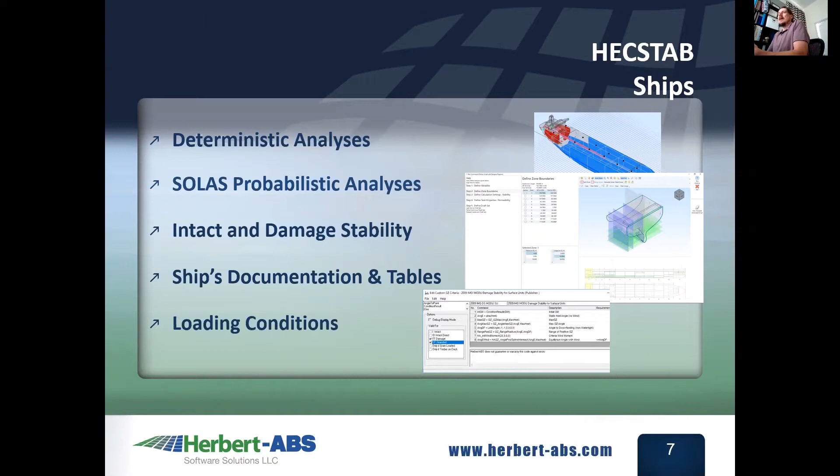On the offshore side, some of the things that we've done for HECSTAB to focus on the offshore is basically we've made our software applicable for any type of vessel, any type of shape, not just ship shapes for offshore vessels. We've looked at jackups and semi-subs and round floating FPSOs and basically any shape that you can define, we can do a calculation for it.

One of the main drivers we've had recently has actually been ABS itself, and we are in the process and working with ABS to have them use HECSTAB offshore as their internal tool for stability approval.

One of the other main drivers for our HECSTAB offshore development has been this idea of a free twist calculation. When you're looking at stability for a ship shape, generally speaking, you're only looking at stability along one axis, the longitudinal axis. For some offshore shapes, the stability axes and how you rotate things and heel vessels over becomes a little bit squirrely depending on the hull shapes and things like that.

So some of the newer approaches are doing things like free twist or variable axis heeling moments or heeling righting arm curves as opposed to just having a fixed heeling axis. So we'll look at some examples of those as we go through some of the hands-on presentation.

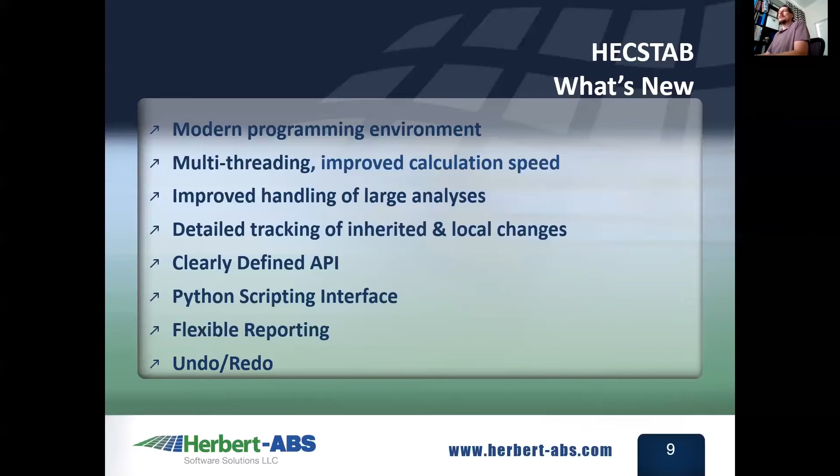and write things in a Python scripting interface to do special analyses or one-off investigations or customized reporting or things like that. We'll go through a number of ways that we're already leveraging this API and this Python scripting interface. We'll also look at the flexible reporting options, and we have added something that people have asked for a long time, undo and redo capabilities. So that's now built into the software as well.

So for those that haven't used our software before or haven't seen the overall package, I like to show this screenshot just as a quick overview of how things kind of fit together. There's two sides to our software package in general. There's going to be the modeling side, which we have here on the left. And there are options to take external 3D models from things like a DXF file or Rhino or other stability software and import them into our modeling software.

But basically, our ship project editor is our main modeling software. That hasn't changed. For those of you that have used HECSTAB before in the past, the ship project editor is still included with the HECSTAB package basically, and is still used to do things like creating the ship project editor reports, things like vessel documents, hydrostatics, Bonjeans, capacity tables, tank tables, sounding tables, things like that. So everything here on the left side is relatively unchanged for HECSTAB. It's basically the same on that side.

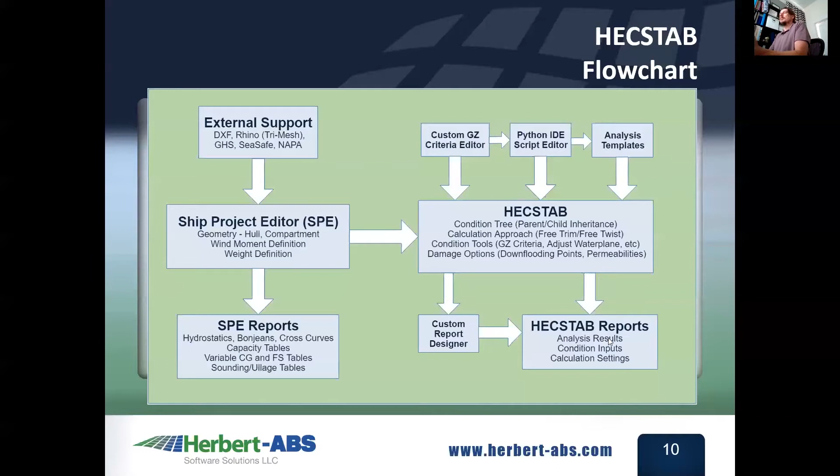The interesting part is here on the right side where we have HECSTAB, which is going to be our main analysis interface, and we'll be looking at this very shortly. But you can feed into it a number of things. There's custom GZ editors, there's the Python or the script editor, there's analysis templates. These are all ways to kind of set up an analysis in HECSTAB. And then once you run an analysis in HECSTAB, you can get custom reports out of it and either view the information on the screen or print it onto reports as you would like.

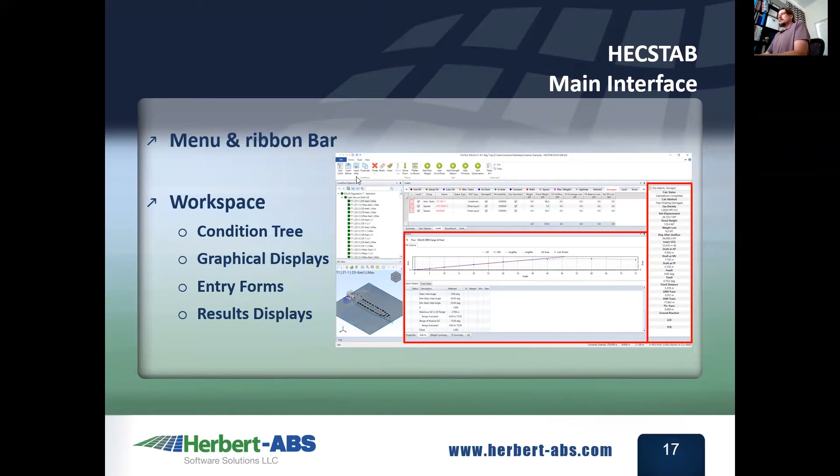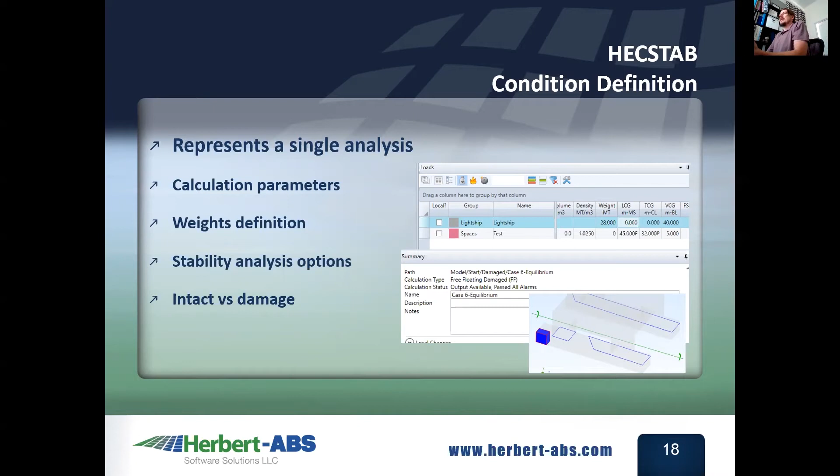The one thing to note with HECSTAB is the idea of a condition. So the HECSTAB interface is going to allow you to set up a hierarchy of conditions, where each condition is going to represent a single analysis. It defines the calculation parameters for that condition, your options, whether it's intact or damaged, your weight definitions. Anything you want to change or investigate is going to be a setting on a condition. So the analysis tree in HECSTAB can do an analysis on one or more conditions.

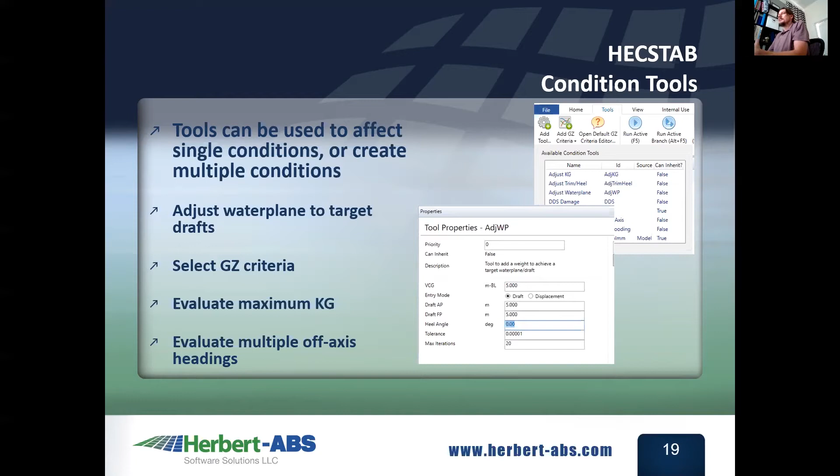We also have this idea of condition tools, which is something that, instead of just having a simple setting or changing a weight, can do something more complicated. It can do a calculation to get you to a specific draft. It can do a calculation to evaluate a criteria. It can do an iterative calculation to find a maximum KG. It can create subconditions to look at different axes. So the idea behind condition tools is that they're very powerful and very flexible, allowing you to set up the condition tree and your analysis in an efficient and accurate way. And again, we'll go through this process in the hands-on section here in a bit.

But we do want to talk about the hierarchy of these conditions. One of the primary things that we're looking at with HECSTAB is the idea of the condition hierarchy and the condition explorer and how things basically inherit down. So I can set up an analysis where I start with a parent intact condition. This is my top level intact condition. And then I can go down and define sub-children where everything kind of inherits from this condition down into my child.

But then I can change something on this step. And then I can add steps below that where things will change on that condition. And everything kind of just trickles down as you go down the analysis. And if you do a full analysis, but then you come back and say, well, let me change a few things here at the top, all of those changes will then trickle down as necessary and as applicable through all the child conditions. And you can easily update and iterate on an analysis very, very quickly.

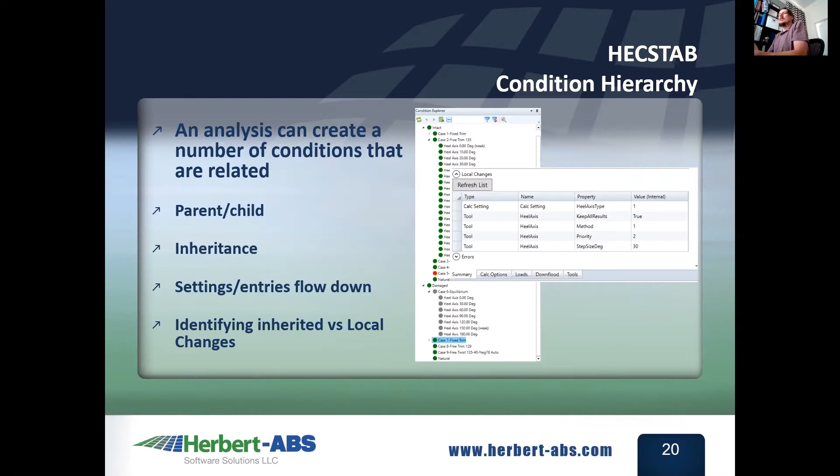A few other things to note: on the HECSTAB offshore side, one of the main new features that we have is the idea of a free twist approach for stability. It's basically representing the path of least resistance, and it allows offshore shaped vessels to heel and rotate as they want to, as opposed to a free trim approach, which is artificially forcing a rotation around a specific axis.

Analysis templates is another one of our main features here in HECSTAB that we've added recently. There is this idea that you can do everything in the user interface and set up an analysis by hand, but if you're doing standard cookie cutter type things a lot, something like an intact max KG curve, then these analysis templates are basically designed to allow us to give you

some templates, or the users can create these on their own, that basically just walk you through the process in a wizard type approach, where just the basics, just the things that you need to enter and define for a given analysis can be entered, and it can easily go through and set up the analysis for you automatically. And we'll look at a couple of these as we get into the hands-on demonstration as well.

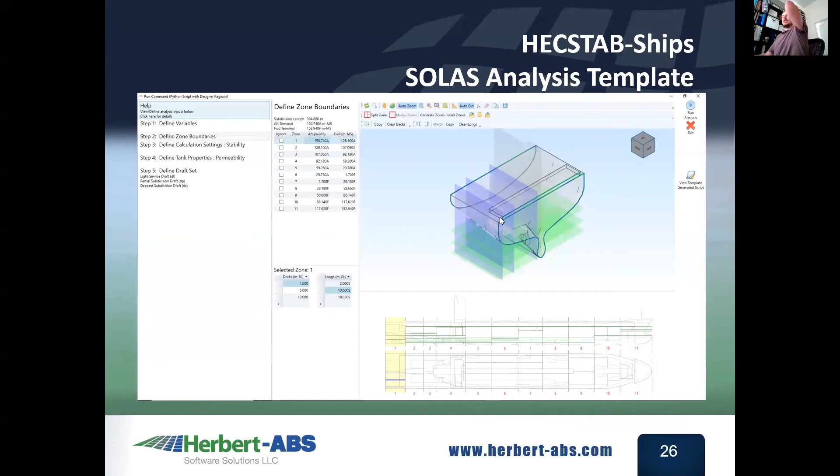So for example, we've added a SOLAS analysis template. I'll talk about this and walk through a detailed analysis on this side as we get into the hands-on presentation. But this is just showing some screenshots of what it would look like. And we'll do this on the hands-on side as well.

And then finally, on the reporting side, we're working on two ways to do customized reporting. We have a database reporting approach, and we're working on implementing a Python script reporting approach as well. And I'll show examples of both of those when we get to the hands-on as well.

Moving forward, with this rollout of our new HECSTAB software, we are trying to build a community and to expand our user base and hopefully get them to share information and share tools and files that they've used in HECSTAB, so that there can be a central repository for GZ criteria, or people that have put customized reports together, or even advanced Python scripts that do certain specific things.

We're trying to encourage our clients to use HECSTAB to develop tools that they need to use, and then possibly share them with others, and have access to what other tools other clients have provided as well.

And then looking to the future, we're going to be working on HECSTAB for the foreseeable future, and it's going to be the foundation for all of our software packages going forward. But in the short term, what we're looking at is doing integrated direct calculation of wind moments. That's been a big feature that's been requested by a lot of our offshore users, and we're getting pretty close to having that available to send out.

Just recently, there's been some movement towards the dynamic stability requirements, and that's going to be a different type of approach on doing stability calculations, but we're looking at adding that to HECSTAB as well.

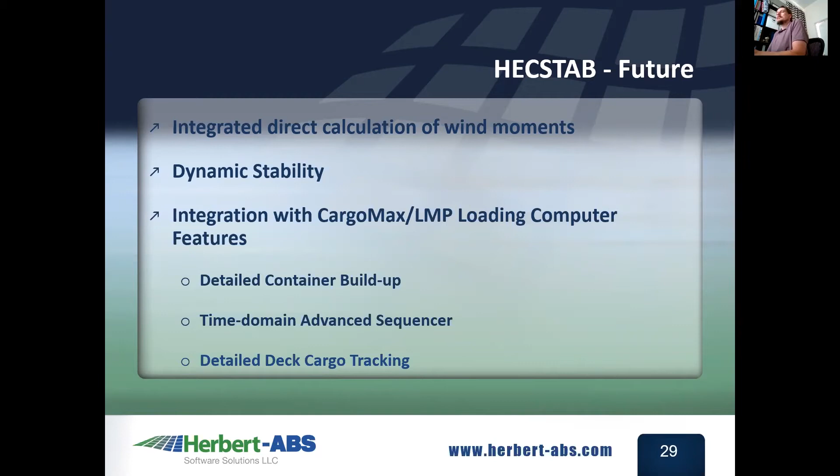And then longer term, we're looking at better ways to integrate and upgrade our software and integration with our onboard loading packages, CargoMax and LMP, including things like detailed container buildup, detailed container loading, advanced time sequencing, and detailed deck cargo tracking. So this is all looking towards the future, but there is a bit of a roadmap as we're going forward on this stuff. So that was a very quick presentation.

So that's the quick presentation, and what I'd like to do is just jump right into doing some hands-on examples. So I'm going to go ahead and start our new version of HECSTAB here. And the first run through I want to do is just to give you an overview of what the new user interface looks like, and show some of the benefits and perks and interesting new features that we have in the software.

So as you can see here, I hope everyone can still see my screen. This is the new HECSTAB user interface. So the first thing to note is that we've got on our back page here, HECSTAB is going to work off of 2 file formats. You need a model to work with. So when I started HECSTAB, I picked a model to load up that has all my ship properties and everything defined on it. And then any analysis that you do is basically going to be saved as or loaded up as a project file. So if you're looking at it from like a Word or Excel standpoint, our HECSTAB project would be similar to a docx or an Excel file or something like that.

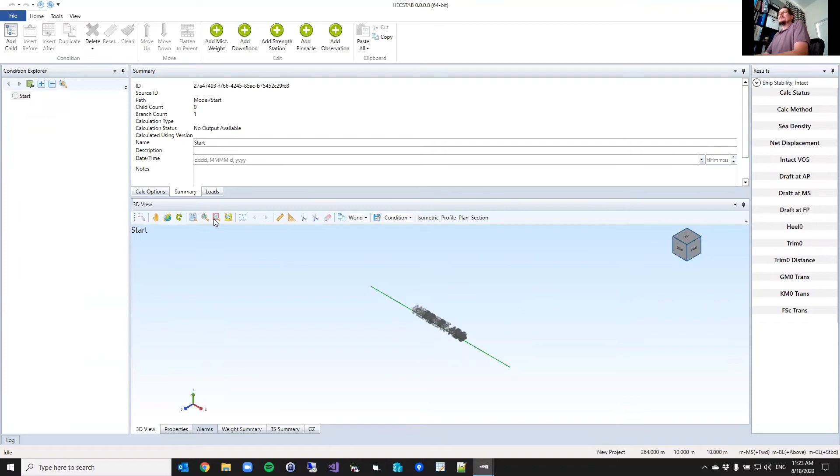So I'm not going to load up any files for now. I'm just going to kind of show off the interface. We'll look at a number of different examples as we go along. In this case, I've actually loaded up a pretty interesting ship. This is our Herbert-ABS logo. We put this together in Rhino and imported it in. So again, not a ship shape. It's very, very interesting geometry, but you can see we can do stability calculations on anything that's basically defined as a volume.

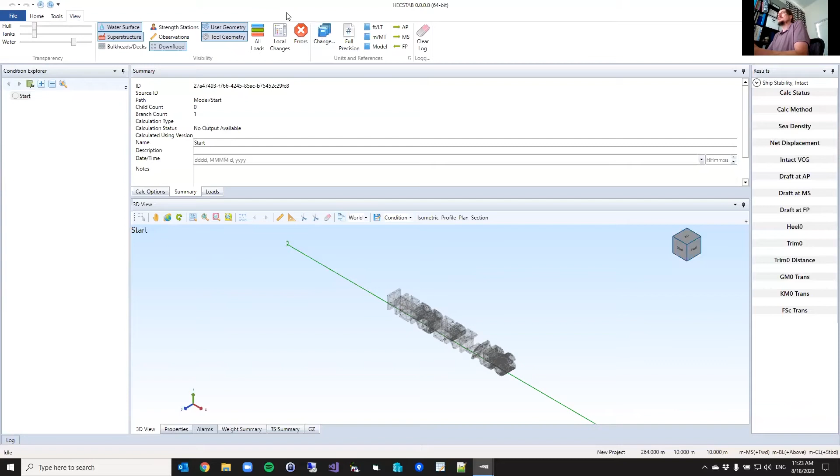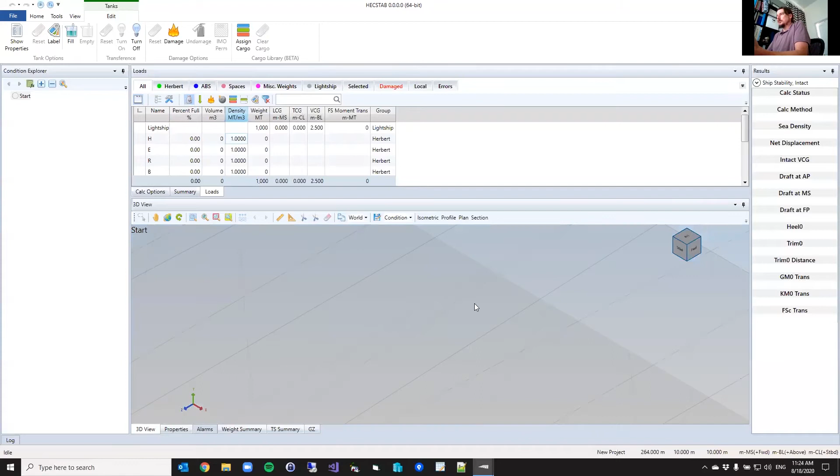On the user interface itself, we've got the modern ribbon bar. There's lots of tools and ways to change what you're looking at and to get information. This is very customizable. We'll look at things like analysis packages where we can add items to the ribbon bar. It's context sensitive. So if I pick a tank, for example, I get a ribbon bar for how I can edit tanks. So if I wanted to damage my H or something like that, I could do something like that. Everything is context sensitive. As I click on items in the graphic, they'll show up here in my loads table, things like that. So everything is very interactive in the ribbon bar and in the interface itself.

You can customize reports and customize things. Like I've put a couple quick items here for doing quick calculation buttons up here on the top. You can always hide the results bar as well if you wanted to. Just give you a little bit more room and space. Just very basic things that come with most modern software these days.

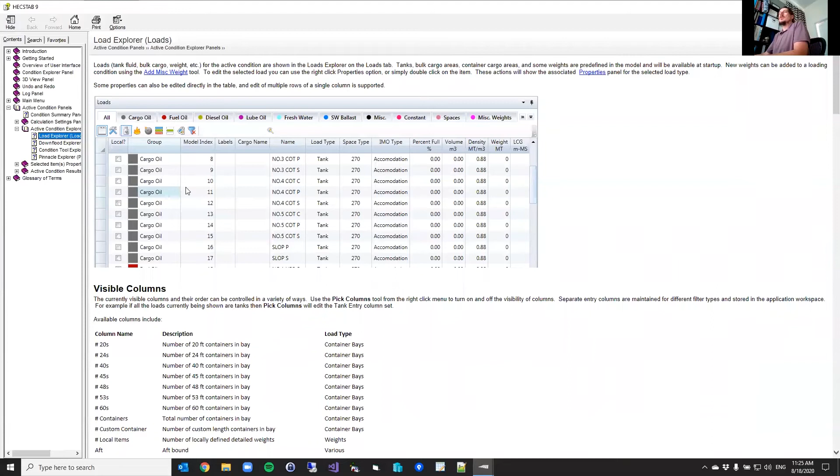We also have context sensitive help. So if I'm actually on something here in the interface and hit F1, it'll bring up the help menu. And as you can see, I was on my loads entry table, so it's bringing up the context sensitive help for the load view basically. So very modern interface, very modern interaction.

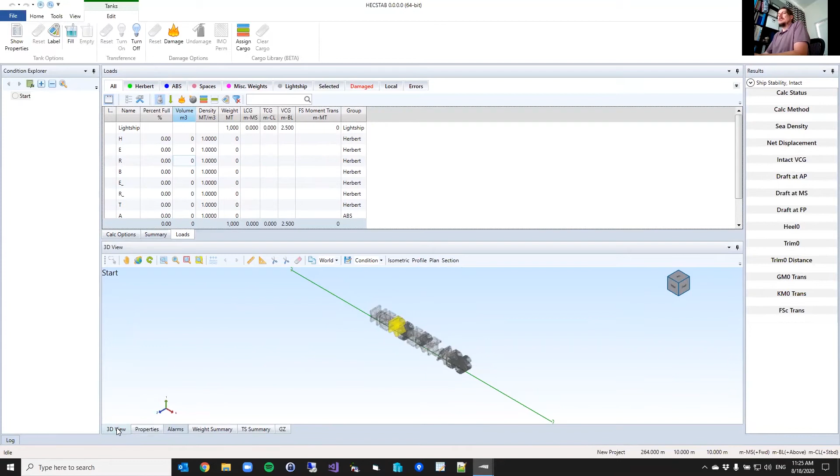The other interesting thing with the way that we've put this together is everything that we're looking at in the workspace is very customizable. So everything is resizable. I spend a lot of time moving things around. If I want to zoom in or zoom out on something, I can move things and resize things pretty easily. But more importantly, it's very easy to move items around to see them how you want. So if I wasn't as interested in the graphics here, but I wanted to see my results, I could take this and move it over to the bottom here. So now I can keep my little graphic up here on the side, but I can actually look at my weight summary or my GZ summary instead.

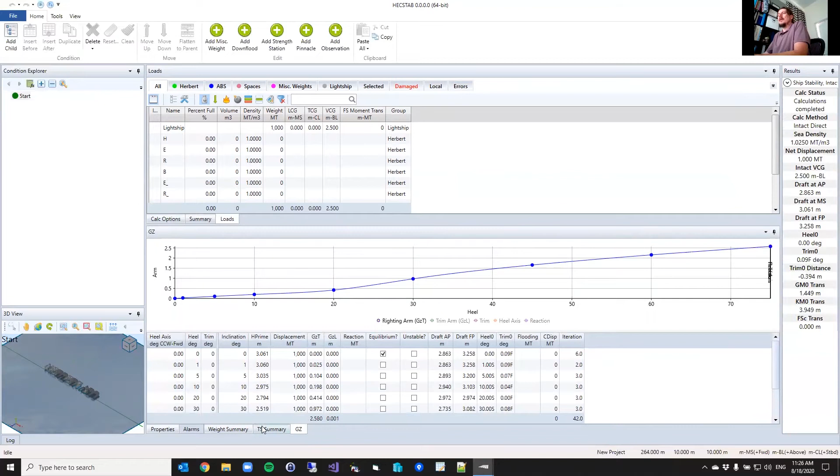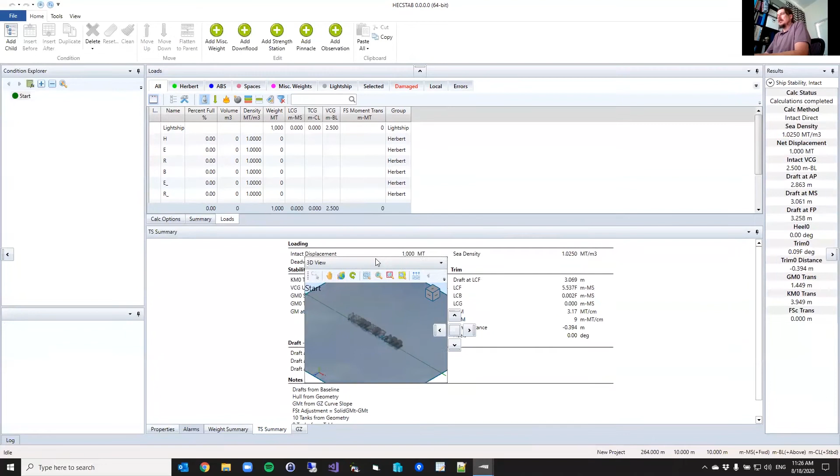So let me run this analysis so I get a GZ curve. So I've got my graphics, I got my righting arm curve, I could look at my TS summary, things like that. So every tab, every heading, every interactive feature on here can be moved, it can be resized, it can be relocated. So there's a lot of ways to set up your view to customize it however you want. You can actually have floating windows as well. So if I just take this out and don't dock it anywhere, it's actually a floating window now. I can resize this and have this on a second screen if I wanted to.

I just moved it off onto the other screen. So there's lots of ways to kind of customize the user interface to allow you to get the view and to get the information at your fingertips that you want. You can relocate, move around, floating windows. There I just showed you.

You can actually have sliding windows, like the log kind of hides and shows. I could do the same thing over here on the results window. If I wanted to make that kind of a slide in out type of thing, I can do that. So that's the user interface in general.

And for those of you that have used HECSALV for a long time, you'll see a lot of things that you're used to, but probably a lot of things that are going to be new. There is a little bit of a learning curve involved, but we think that there's a lot of improvements and a lot of benefits for the new way that we put everything together. So that's just the basic UI.

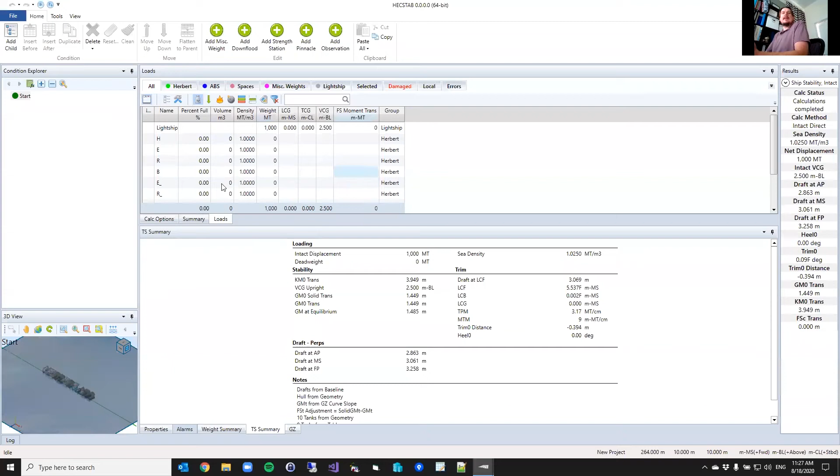Now I'd like to kind of look at a real analysis. So I'm going to close this, and I'll load up a different model this time. So this time when I start HECSTAB, it's asking for an SH2 file. So I'm going to look at my semi-sub example that I have here. I'll load up my SH2, my ship model that I've put together previously, while that's loading.

And then this time, I'm actually going to load an analysis project that we've put together. So I'm going to open a project. I've got a couple here. I'm going to start with this single case here. So this was an analysis where we basically started with a start condition. And then the first thing we did was actually just define a loading condition.

So this is where I like to talk about the idea of the condition explorer and inheritance. One of the really neat things that we've added here is I can actually see what my local changes are for each condition. So on this loading condition 1, I've set my wind source, I've set my percent full on all of my tanks, I set volume for these two guys. So I basically defined my loading condition. I added a GZ criteria as well. So this is everything that I've defined on my load case 1.

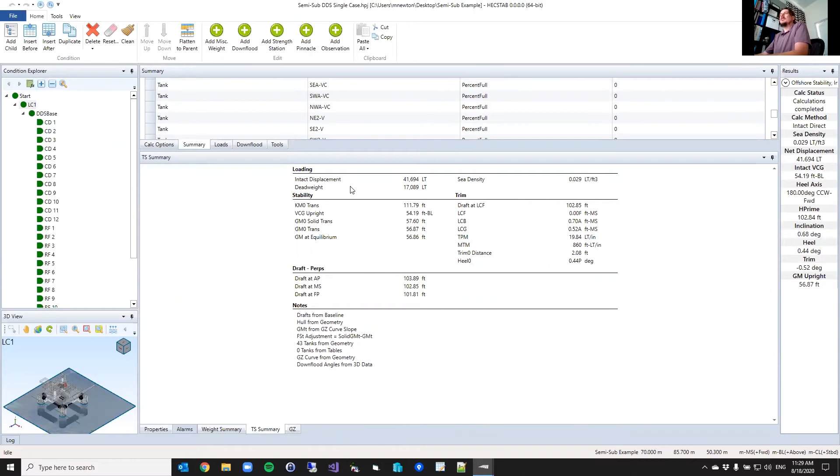So now that I've run this, I have a trim and stability summary. This is my overall stability results for this condition. Here's my righting arm evaluation. If I look at my alarms, I have my MODU criteria. So I have an evaluation here where I'm doing the MODU evaluation. If I look at the graphs, I've got a heeling arm curve, I've got my GM, I've got my righting arm curve, I've got an area evaluation.

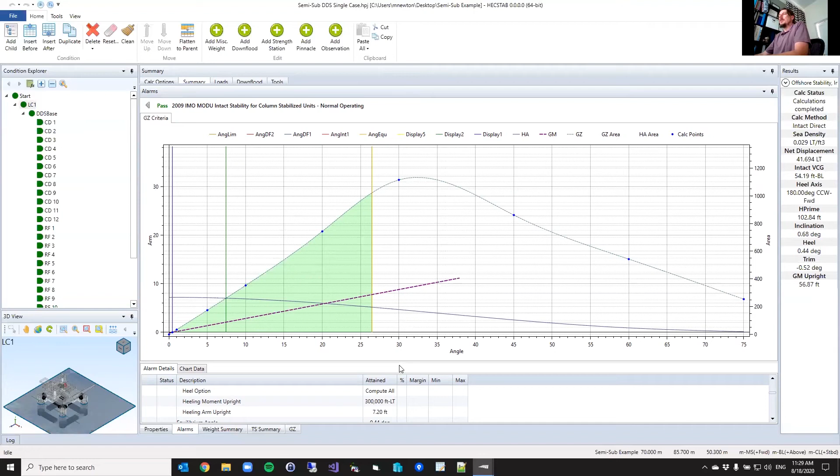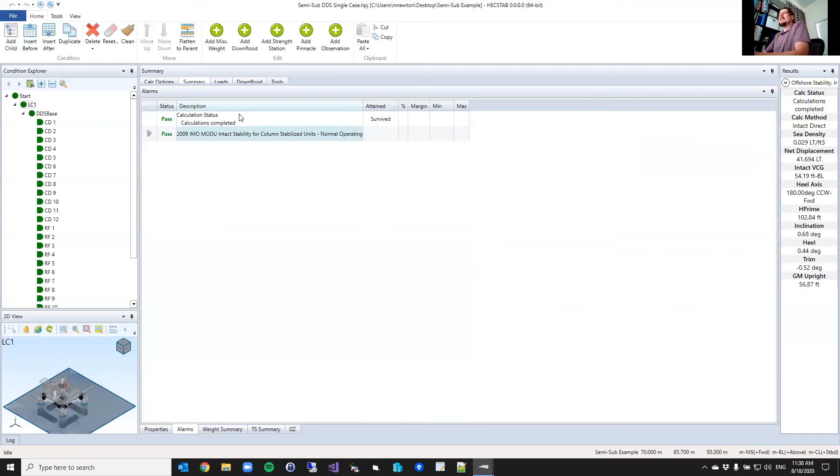So this GZ evaluation is very customizable. We ship a lot of predefined ones, but obviously it's going to be impossible for us to stay on top of everything, so we give you tools to define these GZ criteria as necessary. For those of you that have worked with MODU before, it's a simple criteria that your GZ is positive up to your second intersection of your heeling arm, and that you've got a certain area ratio. So everything here looks good. My alarms are passing. I don't really have any other alarms defined on this case right now.

If I look at my load summary here, I look at my ballast tanks, for example. Here's my 8 or 12 ballast tanks. I can see this is, again, a very simple loading condition where all my ballast tanks are full. My diesel oil tank's 95% full. I've got a chemical tank, methanol tank. So a very simple model in this case, but I've used my loads entry to define this condition. And I've done an evaluation. And according to my MODU criteria, this loading condition will pass.

So now maybe the next step would be to do an analysis to look at damage stability. I want to make sure that it's going to pass all of its damage stability requirements. So I could add a subcondition here called deterministic damage stability. And on this one, I've basically made a couple changes.

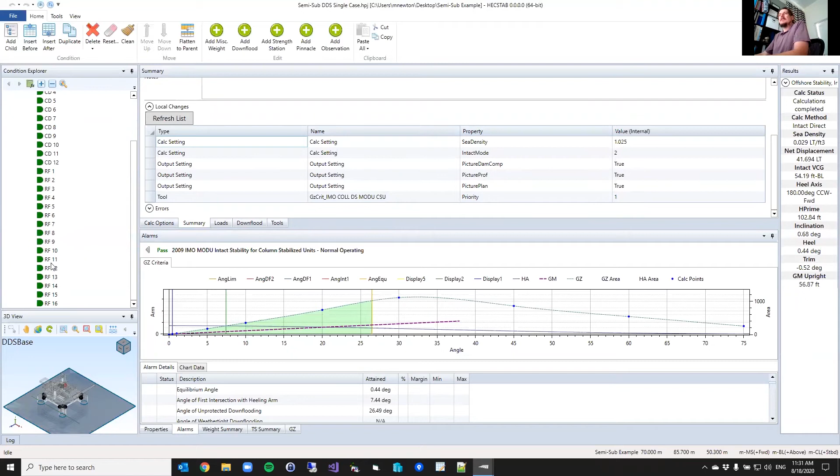I've only really added a tool for my damage stability MODU criteria. And then if I look, I've defined about 30 or so damage cases here. So if I go to this condition, I can see that I've turned intact mode on for all of my tanks, and I've damaged NE0-B, and then I've added a number of direct damage stability settings on here as well.

So I've gone through and done this automatically, and you can just see how this information is passing down. So all of these damage cases are going to be built on this loading condition file up here and the starting condition, but then applying these new criteria or these new changes that are local to this condition. So that explains what the condition tree is about.

The other thing that you can look at here is different ways of reporting information from conditions. So I've put together a number of different reports from this. So if I go to my file menu for print, I've got a couple of different options here. I could do a printout for damage cases, for example.

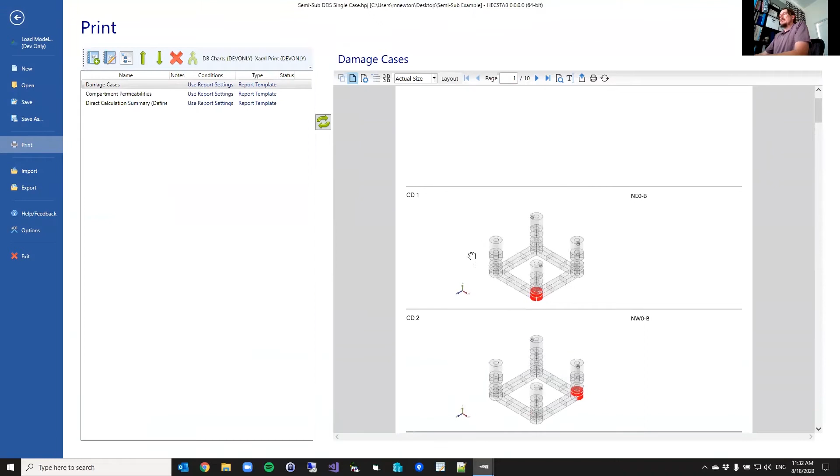So this is a report that we put together that basically just goes through and finds all my damage cases that I define and gives me a list of what their name is, what's damaged, and gives me a quick little graphic of it. So here's a nice little simple damage report. So here's one that has 2 damaged tanks, and so on.

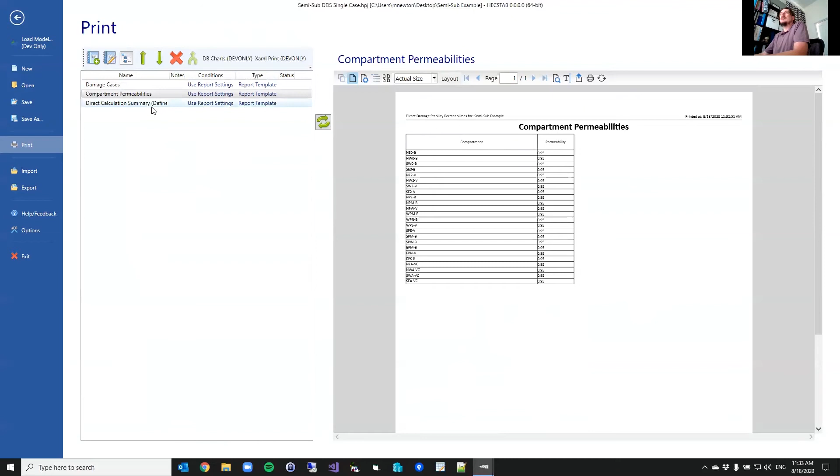Compartment permeabilities. If you were putting together a damage stability study, obviously one of the things you want to put in there would be the permeabilities that you use for the tank. A very simple printout you could add. The more interesting one would be like a one-line summary here.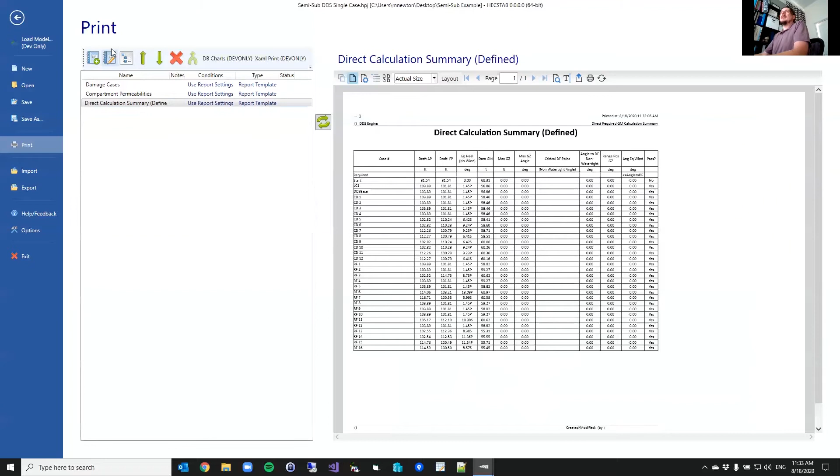So for those of you that have used database reporting before, you can actually go in and edit or create these reports on the fly. So we give you an editing tool. If I wanted to add a new column or change units or change headings and footers or whatever, I can go in here and just modify the report as I want to. So there's a whole lot of customization that can be done here on the reporting side, and we give the clients the tools to do that.

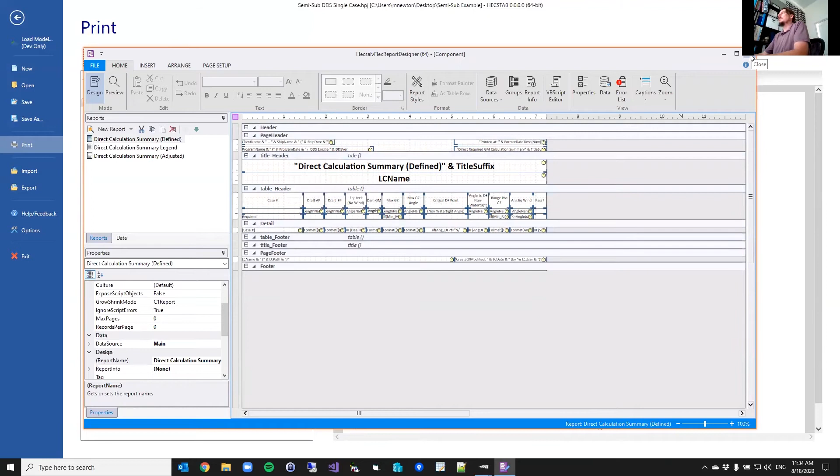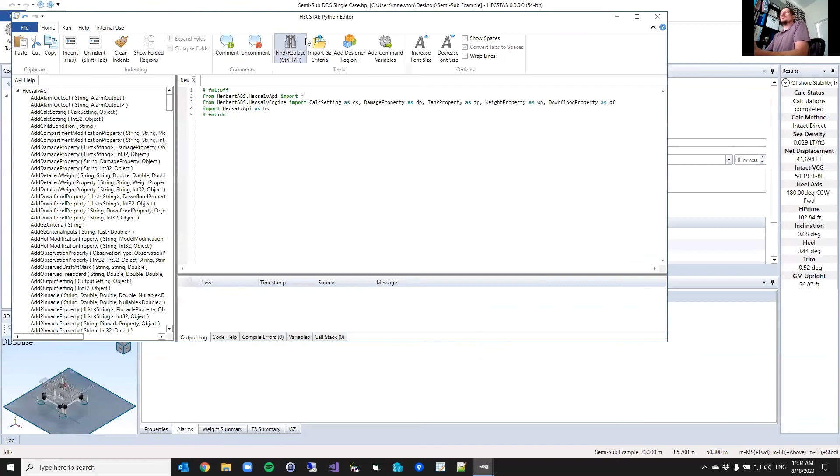The other interesting part is we're also looking at ways to do reporting based on writing a simple Python script, and that would require us to go into our Python script editor. So this is one of our tools in our user interface where I can open a script to make a sample report generation.

I'm not going to get too detailed, but basically it says, hey, select the conditions, and then let's print the condition summary, the alarm summary, the trim and stability summary, weight and righting arm summary, and that's all it's going to do. So if I run this, it's going to ask me for the conditions. I could pick all, but maybe I just want my damage cases, for example. So I can hit OK here, and this is going to spit out a report straight to Word. It'll show up here in 1 second as soon as it's done processing.

Here it comes. So here is the Word document that just got created by that Python script. It created a table of contents. It's got all of my conditions, each of my damage cases here. We ended up with quite a lot, 117 pages worth. And then for each condition, I've got my graphic, my alarm summary, trim and stability summary, weight, righting arm.

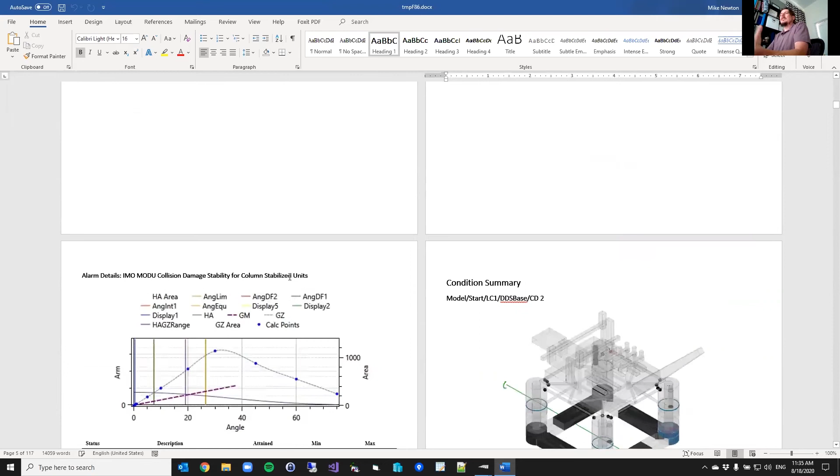So again, very simple ways to do a report, but as a designer, if you're putting together a T&S booklet or a stability analysis, being able to very quickly put a Python script together that automatically generates a big block of these printouts and gets everything set up for you, I think is going to be very powerful and very useful for people to see.

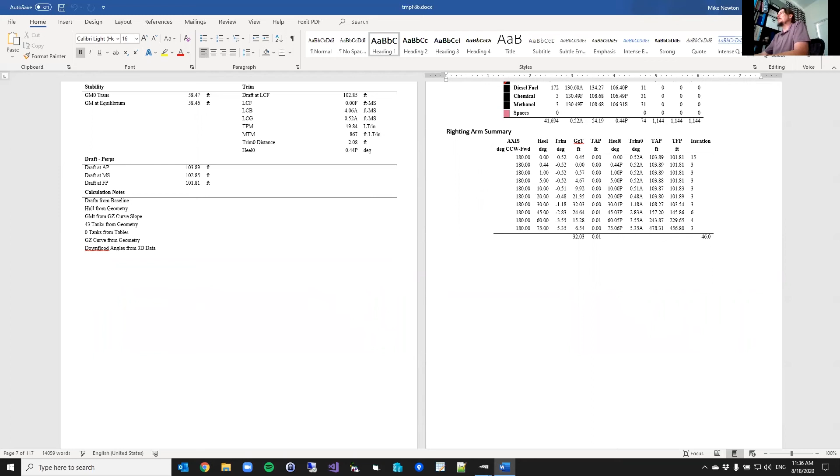So that's the reporting side. We also talked about the idea of condition tools. So we've put a couple of condition tools on here, but I'm going to show you a couple others that we can do as well. So over here in my condition tree, I'm going to just add a child. This is going to give me a new one, and I'm going to call this one

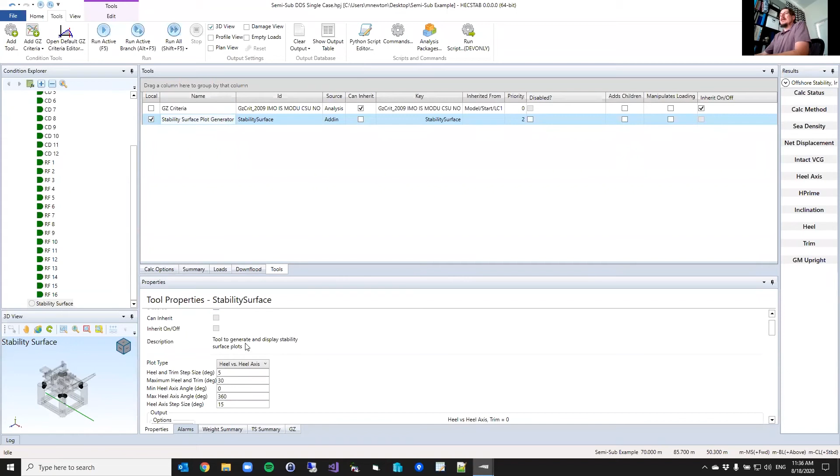stability surface. So this is a tool that basically allows you to visualize the stability of a floating vessel around any axis, basically. So I've added a tool. I use my add tool up here. I've got my stability surface plot generator in my tools list now, and I can define that I want this to be a heel versus trim, and I'll just do the default run here, and I can run this condition,

and it's basically going to show me, once it finishes running, the stability surface. So naturally, if I'm looking at a kind of top-down view, I've got trim along one axis, heel on the other axis. So it's basically showing you how much energy it would take to get to a certain position.

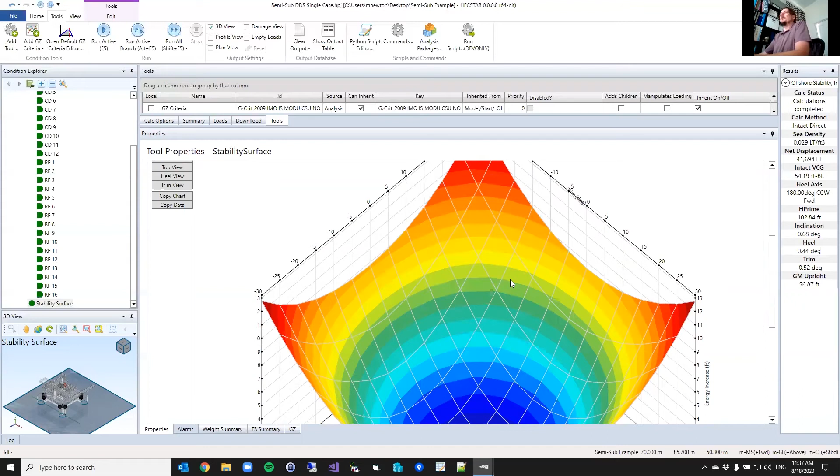So for this ship shape, the diagonals are kind of strong, and the natural axes are kind of weak. So if I had wind or an overturning moment in one direction, there's obviously going to be a lot less energy or righting arm on this side as opposed to going along a different axis, for example. So again, just a very simple condition tool to show you.

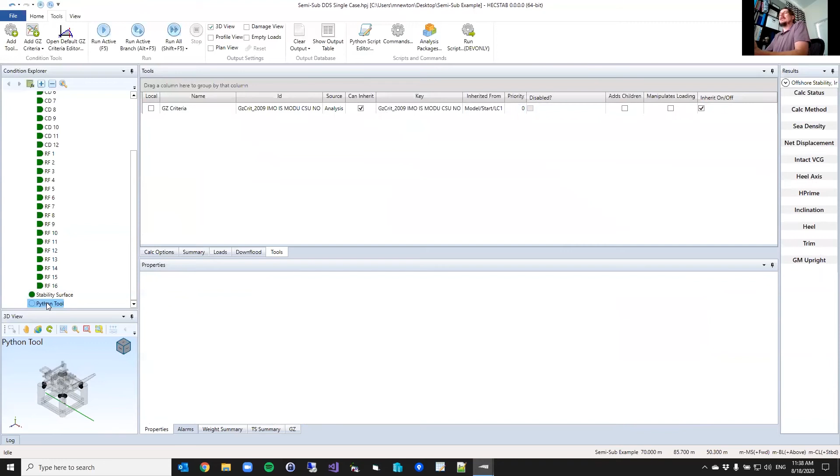There's also a really interesting one that we can do. So like on this loading condition one, I'm going to add another child here just to duplicate it. And I'll call this a Python tool. So again, getting into what we can do with some of the Python scripting using our API here. I have a tool that I can actually just insert a Python script into.

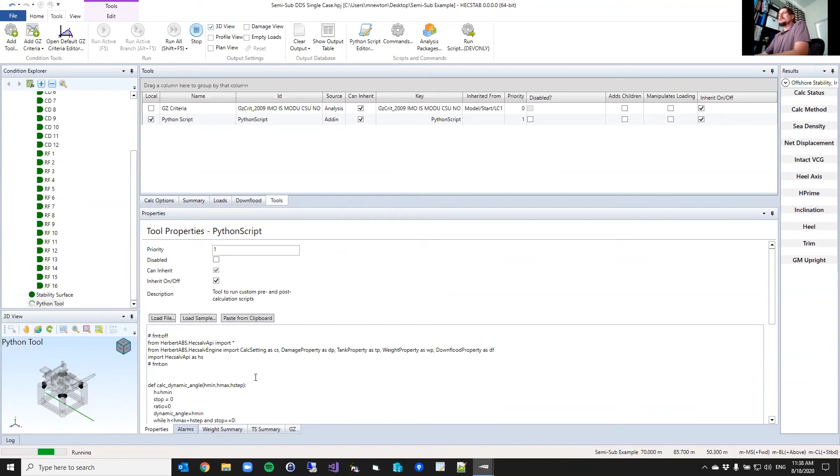So I know I'm going pretty fast. I don't expect everyone to follow along exactly, but this is basically just a script that's going to try to find the dynamic angle. So if I run this script, if I look at my alarm summary, my MODU intact criteria analysis, one of the main things on this criteria is that it has to meet this ratio of restoring area to overturning area.

So basically, the area above the heeling arm curve needs to be 1.3 times more than the area below the heeling arm curve. And you can go all the way out to the angle of downflooding. So in this case, my intact condition looks very good. Everything is fine. I've got a healthy ratio. My angle of downflooding is 26.49 degrees.

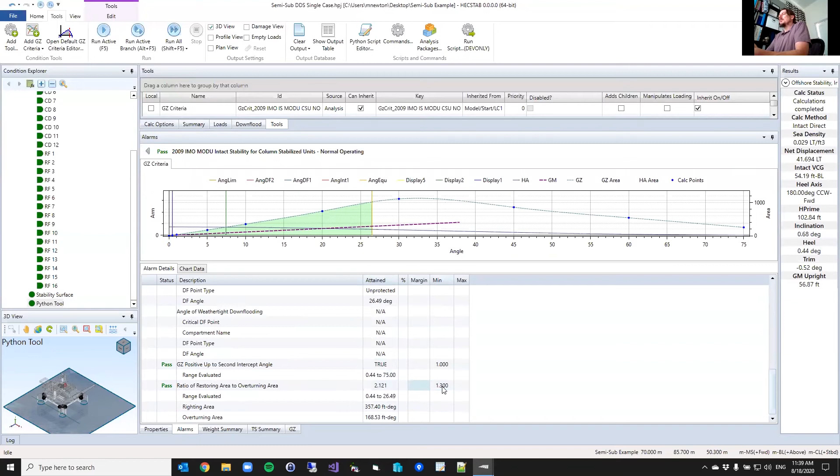That Python script that I just added, what it actually does is it determines the dynamic angle, basically where I would have to limit my righting arm curve so that this ratio is going to be 1.3. So in this case, running that little script added on this dynamic angle calculation for me that basically says, hey, for this condition, if your downflooding angle was 18.4 degrees, that's where you'd be at the tipping point

of failing your criteria. So this would be something useful for an initial preliminary design where you're not quite sure where to put downflooding points or where things can be located. This will give you an idea of, hey, as long as I'm outside of 18.4 degrees, it's not really going to impact my stability in this case. So again, just a very simple example of adding a condition tool.

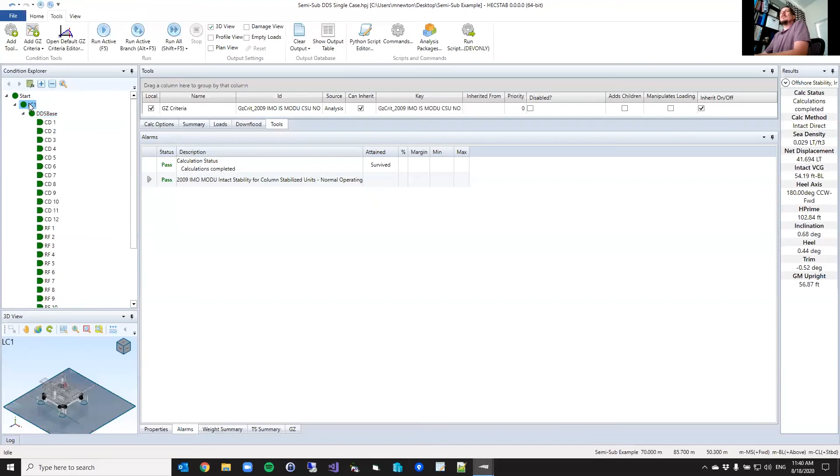Another really neat thing about our user interface and the way this hierarchy is set up is I can save this, I can copy and paste. So if I wanted to just copy all of these damage cases, I could copy this. It'll copy this and everything below it. Let me do this first. I can actually just duplicate this entire tree. So if I had LC1, I could call this LC2.

And in this case, maybe I just want to change my starting condition. So in this case, I want to go to my loads and just say, hey, on this case, these ballast tanks are actually 0% full. And now all of my damage cases are still going to be down below. Everything that I've set up below is still here, but now it's going to be running all those damage cases for this new condition.

So I could run my active branch and it's going to start here and it's going to start going down. I probably expect some of these will start failing at this point, but maybe not. But it's going down and doing the evaluations, doing the calculations and everything like that.

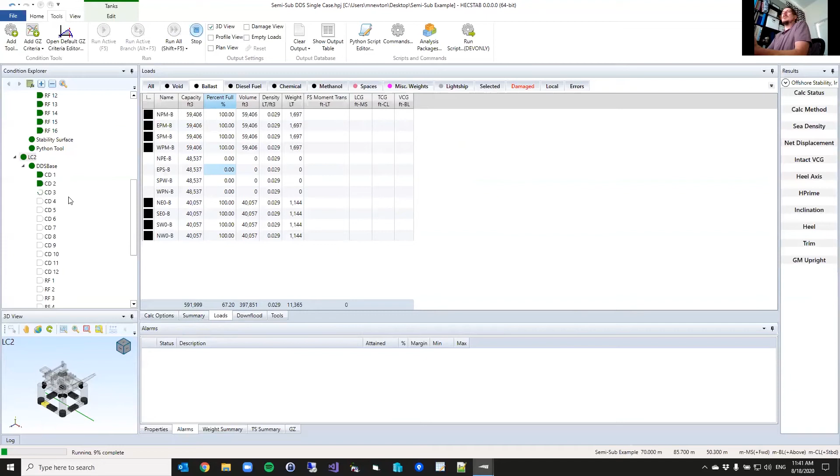While this is running, another thing that might be nice to see from what you've seen in HECSTAB in the past is I can interact and I can pick different conditions. The calculation is going on in the background, but I can actually change and look at results as they're running and interact here in the program. I'm not going to let it go through the full calculation. I'll go ahead and stop this.

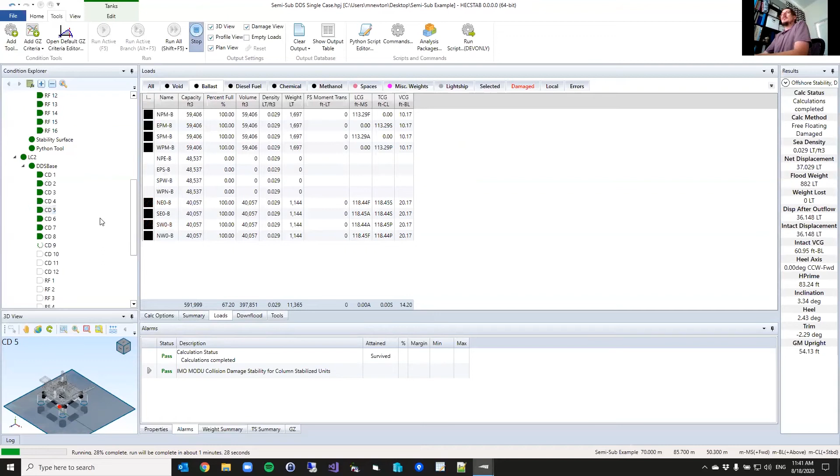The other interesting thing that you can do is, if I have all of these damage cases, I can actually take this as a branch and I can save this out and use it for a different analysis. If I wanted to copy these damage cases, I could go File, Export. I want to export my branch and I would save that as my HIN. This is our export branch data.

And then if I actually opened up a new analysis, so I'm going to go back and open up a new project. So I'm going to open up this other project that I put together, intact off-axis max KG. So here's another analysis that I did. This was set up looking at different drafts and then looking at different heading angles.

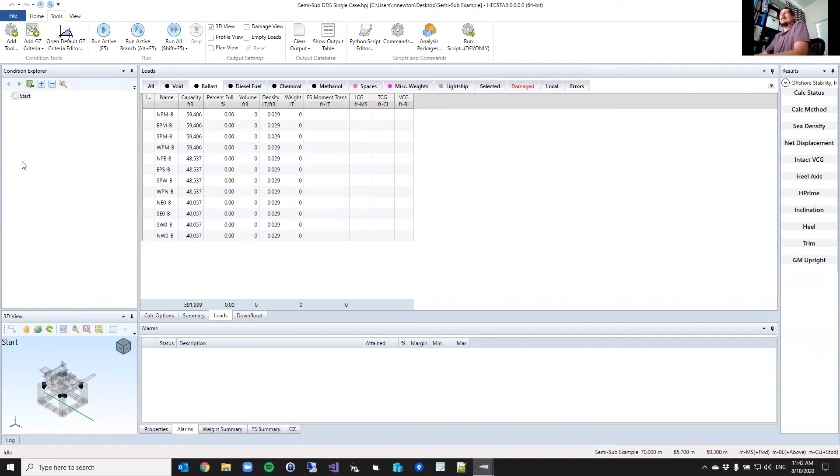So in this case, whoever put this analysis together said, okay, I need to get to a 30.18 draft, and then I need to look at my heel axis every 15 degrees around the tree. And I'm finding a maximum KG analysis for this. So this was something that someone set up here by hand.

I could also, if I wanted to add a damage analysis to each of these, go on here and just go File, Import. I can grab those damage cases from this guy, and so now here's all my damage cases. So I could run the damage cases for this draft, and so on and so forth. So very flexible in how we can move conditions and move inputs and outputs around in the tree.

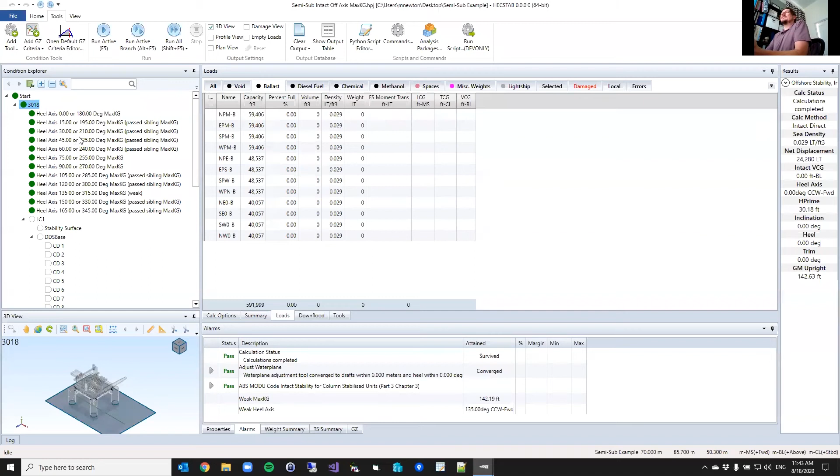And then finally, this analysis itself can be set up as an analysis template. I'm starting with a brand new project. Everything is blank in my project. If I go to my tools menu bar, I have this analysis packages button here, and this allows me to add a whole lot of different customizable reports. So one thing that we put together is an off-axis max KG package. So if I load this, I get a new ribbon bar, I get a couple reports and a data table.

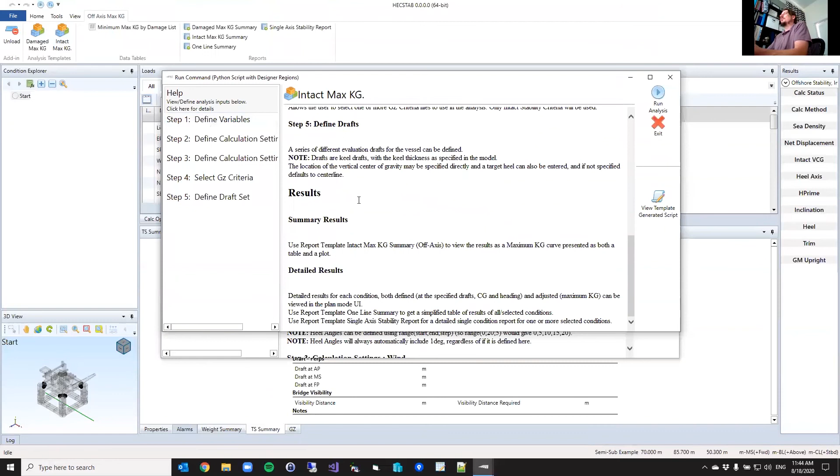Well, the important part here is I get an analysis template. So I could walk through and do an intact max KG analysis very quickly. So I click this analysis template. It gives me the step-by-step process for doing this analysis. So I define my variables. Just to speed things up, I'm going to make this every 30 degrees.

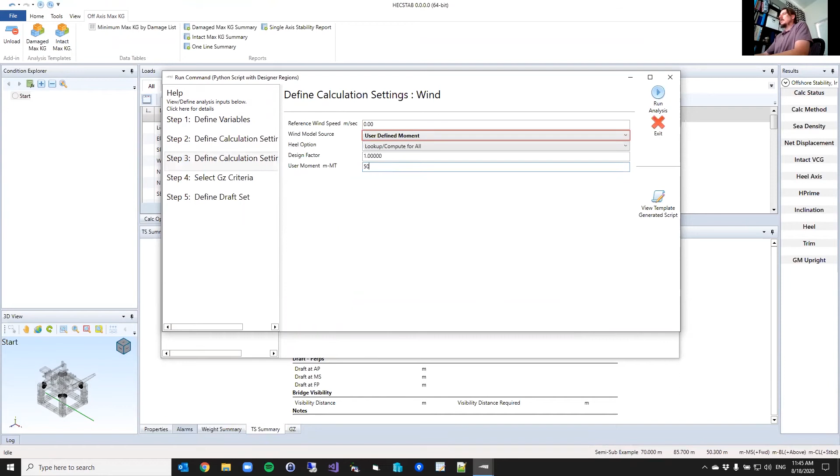I define my settings. Again, just to speed this up, I'm going to do a pretty minimal range of angles. I'm going to force a wind moment of 500,000. I pick my GZ criteria. I'm doing an intact analysis, so I'm just going to pick my intact analysis criteria.

I'm going to define my draft set. I have this saved already over here. I can copy and paste it from Excel. I could enter it by hand, but I'm just going to copy it and paste it in here. So here's all my drafts. Oops, I missed a step. Forgot to switch it to metric or to English. Try that.

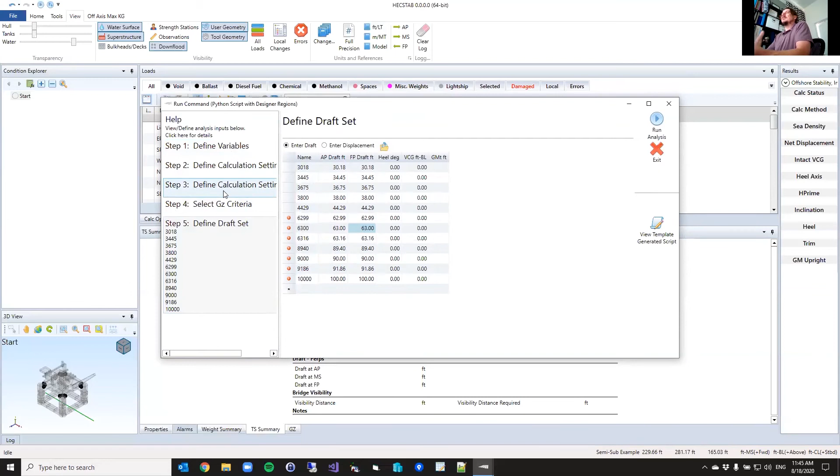There we go. Now we're in feet. So basically, very simply, I've only defined the specific things I need to do for this analysis. If I run this analysis now, it's going to set up my condition tree for me here, and I'm going to go ahead and get this kicked off. So I'm going to run all.

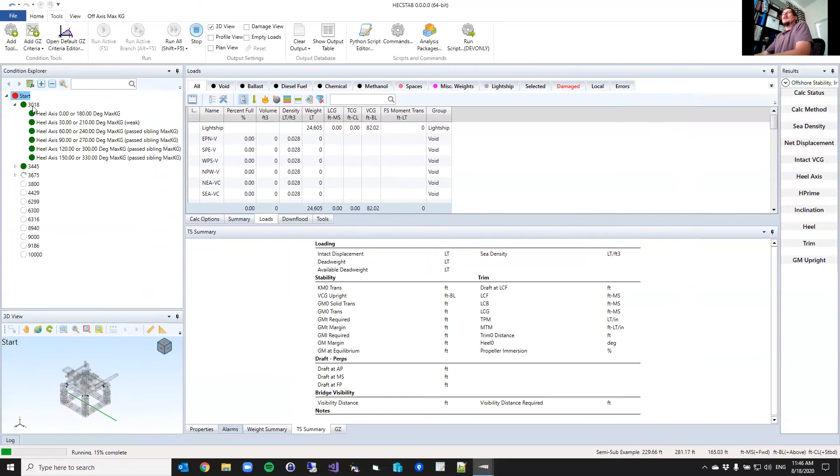You can see it set up a start condition, and now it's set up my first draft of 30.18, and now it's doing the sub conditions, looking at each 30, 60 degrees. It goes through and looks at things. It's finding the max KG. So for this one, at my 30.18 draft, my weak axis out of the angles I'm looking at would be this guy. If we look at our righting arm criteria, we can see that this was governed by the area ratio. So I would expect in this case, our area ratio is going to be very close to 1.3. Yes, there it is.

So we've gone through and done an analysis. It's doing each draft. It automatically creates the condition for the draft. It creates all of the conditions for the different heading angles, and it goes through and calculates everything as it goes along.

This is going much faster than I expected. I still have a lot of things I want to show, and I'm running out of time.

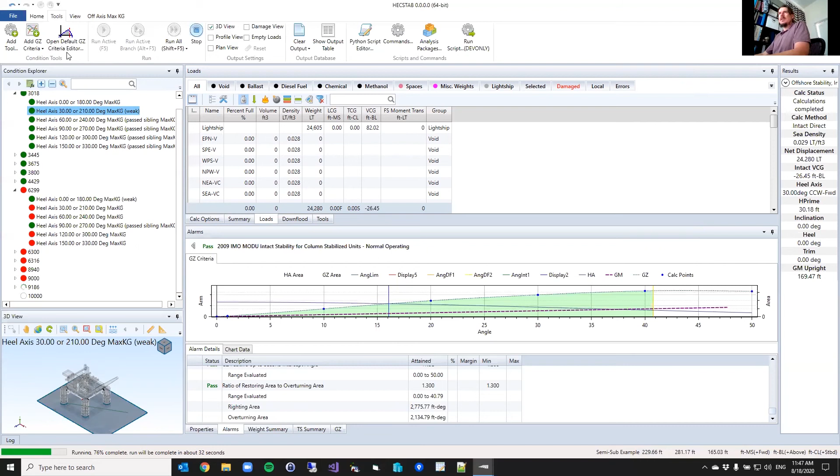I think I would like to move on to another example. This was a very simple analysis package. I am going to show you a more detailed and complicated one that we've put together as well. So for anyone that's done a SOLAS probabilistic analysis for a container ship or a passenger ship or something like that, you know that those can be quite complicated. And again, we've tried to make it so that our analysis package and our analysis templates distill that down into the very basics of what you need to do a full SOLAS analysis.

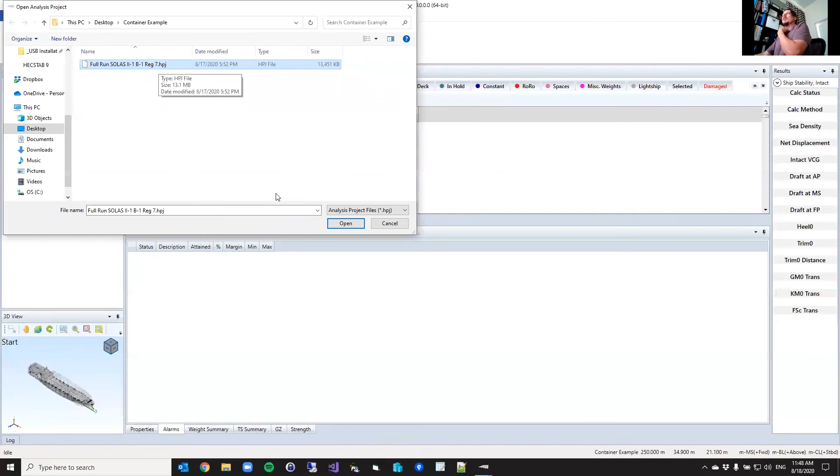So I've already got this one pre-set up because it does take a little while to set up, but I'll open up a project where we've done a full SOLAS Reg 7 B1 analysis. This one is pretty interesting because it took about 5 seconds to load up. But if I look here in my summary, this is 1,500 conditions. So this is an analysis that already has 1,460 conditions.

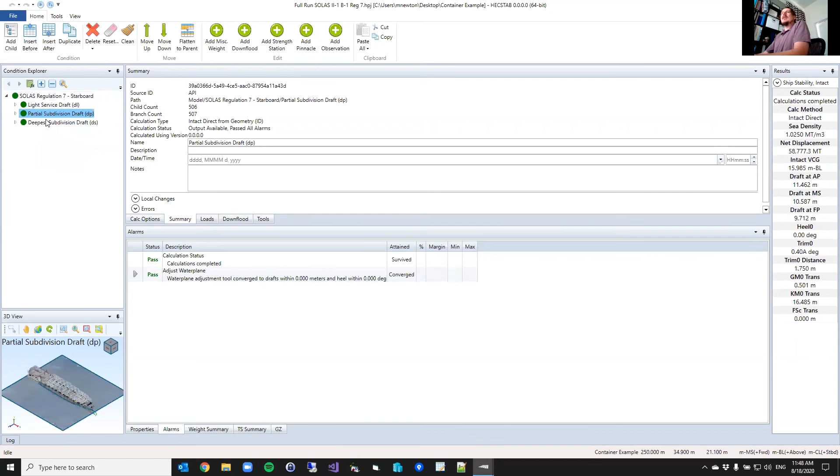We can see that we've got 3 drafts: light service, partial, deep draft, and then for each of those, this one's got 440 children. This one has 500 damage cases. This one has 512. So creating all those damage cases by hand would be very difficult. So what we've done is we've put together the analysis package for this, and I'll load up this as a ribbon bar. So again, we've got a whole new ribbon that shows up here at the top.

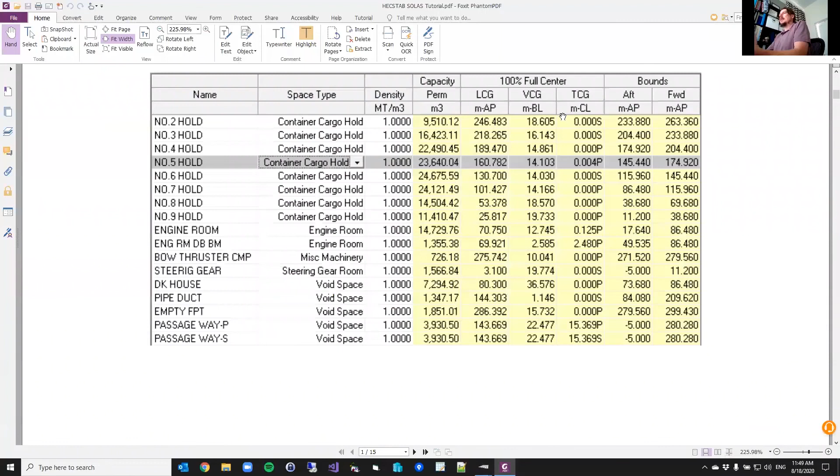I've got an actual tutorial here, a PDF that walks me through the process of using this if you wanted to. This comes with the software. But the interesting part is if we look at the analysis package itself, or the analysis template, it's basically been distilled down into 5 basic steps. You define your variables, your max subdivision draft, maybe if you're doing starboard or both sides, however you want to do it.

You define your zone boundaries. Here's where a lot of the SOLAS analysis and iteration comes in, defining your longitudinal locations and your deck and longitudinal breakdown. So we've got a whole interface for defining these things. Defining your stability calculations, just what angles, what righting arm curves you want to use. Defining your permeabilities. For this one, there are some special cases where the permeability will change based on different drafts, so that's built into this analysis as well. So as long as your model is defined correctly, it's pretty straightforward.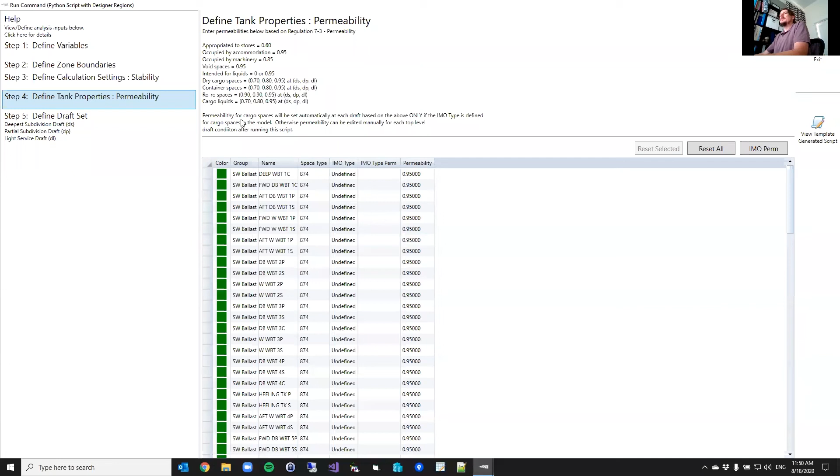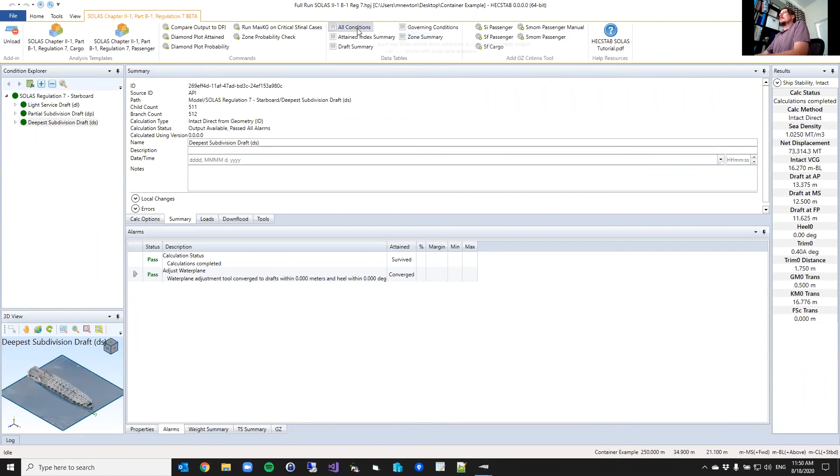You define your draft set. So you set this up once, and it'll run through and create this analysis and run all the analysis here for you. And then ultimately, if you wanted to look at your attained index summary, here's the main summary, saying here's your damage cases, here's your attained summary.

Again, I don't want to go into details of SOLAS, but we've distilled it all down into the tools and commands and reports that can be used in the SOLAS analysis, and hopefully made it a very straightforward process to set up the first time. And then obviously the power of the software means that if you make changes, you can easily go back and have all those changes trickle down through all the sub-conditions as well.

I'm trying to speed things up here a little bit because there's a few other things that I wanted to go to. I saw a couple chats asking about whether HECSTAB will be phasing out HECSTS and HECSALV.

HECSTAB is going to be replacing HECSTS. It's the same type of approach. If you've used the older version of HECSTS, the idea is that HECSTAB is that same package. It's the design package. As far as phasing out HECSALV, we are going to be maintaining both versions kind of in sync for a while, but this package can be used for salvage analyses as well. So I can do a quick example of a salvage example, what we have so far.

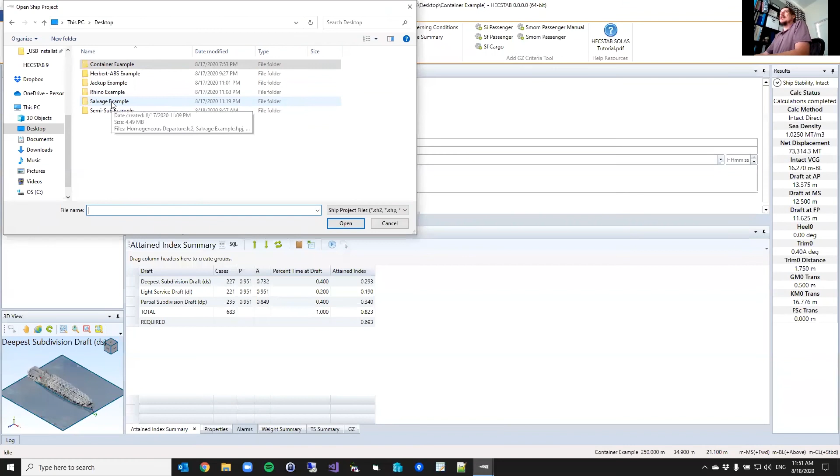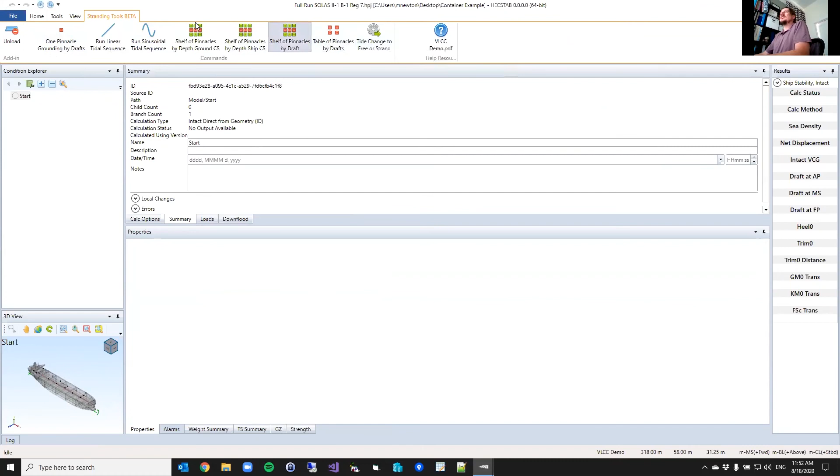So if I load up a VLCC demo, for example, I'm going to close out of my SOLAS, I don't need it anymore, but I'm going to add my analysis package for my stranding tools. So now I've got a list of items up here to do a single pinnacle grounding or a table of pinnacles, change tide sequence. I can open a project that I've already, not this one.

Here's a simple project that I've put together where we go through a very rudimentary analysis. So in a salvage, you would start with maybe what your departure condition was. Maybe you get this from the loading computer or from the ship itself. And then you say, okay, in this case, I had burn off. So here my local changes are I've put all these tanks to 50% full instead of 100 or 95%.

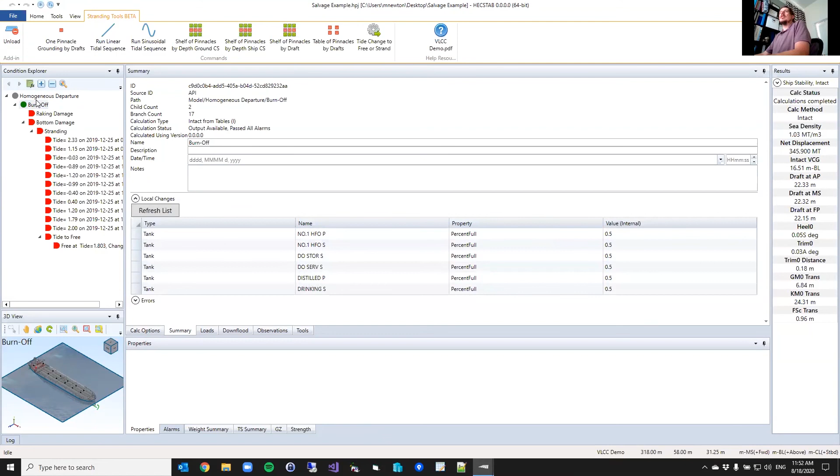And then I have possible raking damage, so I could do an analysis where I damage 3 tanks and say that they're damaged here along the side. I've got full outflow on all of these. Or I could say, oh, actually, I've got a bottom damage. So in this case, I'm turning on things like damage for these tanks.

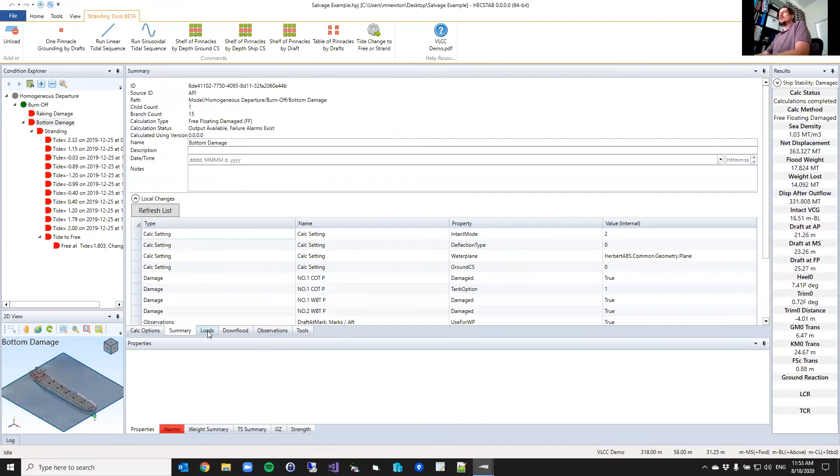And if I look at my loads, my damage tanks, so for my cargo tank, I've actually turned on my damage. I've turned on hydrostatic balance, for example, so I can still do things like that. I set my balance point at the bottom corner. The next step was I actually added a pinnacle. I've added a stranding. I use this one pinnacle grounding by draft that basically defined a grounding situation.

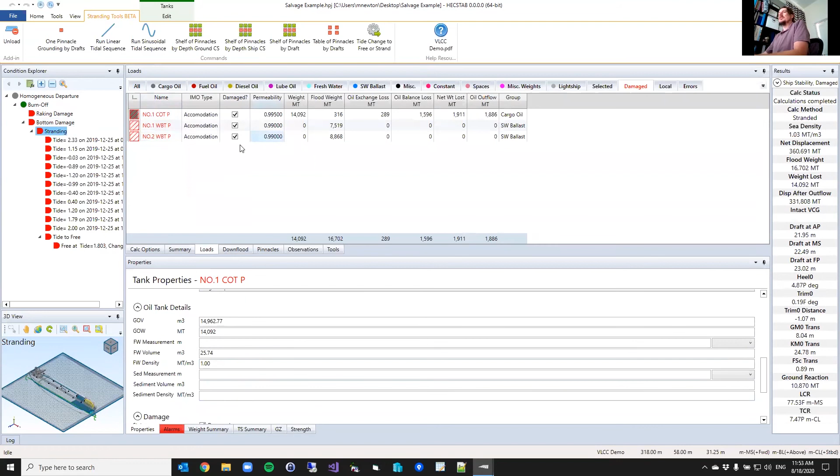If I look at this, let me bring this guy back over here. So we can see here, in this case, I've got a pinnacle down here on my graphics. I'm trying to get a good view, but I can't quite get to it. Based on this definition, here's where I grounded. I've got a ground reaction of 10,000 tons. If I look at my strength summary, I'm probably going to be way off the charts where that grounding is. Obviously, there's a large shear there in that location.

So anything you could do in the old version of HECSALV for salvage, we're working on implementing them. There's a lot of things in the existing version of HECSALV that we haven't brought all the way over yet, but we are. The idea is that this will be HECSTAB and salvage response, emergency response package as well going forward. I have tools, again, running a tide sequence or running a script to figure out what tide you would need to free. All of these things are built into this analysis package.

Again, I'm trying to move kind of fast because I know we're running out of time. There was one last thing that I wanted to show. I saw some questions on the modeling side that popped up. The modeling is going to be the same between HECSTAB 8, HECSTAB 9, HECSTAB. It's all going to be using the same approach, but we are working on a couple of different things.

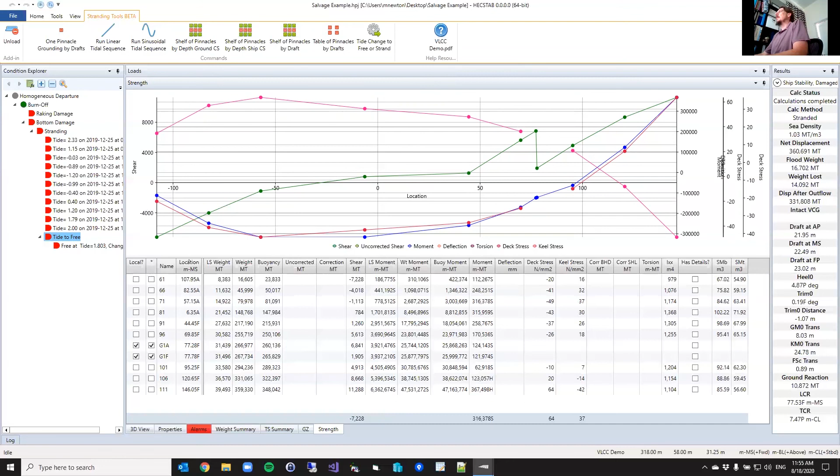One interesting thing with what we have with HECSTAB 9 and having access to our API is that other programs that allow Python scripting, we can run scripts within them.

So, for example, Rhino is a 3D modeling software package; here's a very simple model that's been put together. So if you wanted to do modeling in Rhino, you could do this. In this case, we've got a poly surface. I've got a cargo tank. I've got a hull defined. The only real consideration here is that we need closed poly surfaces or closed poly lines, I believe.

So, I could use Rhino for my 3D modeling. I can put a model together like here. I've got 4 tanks. I've got a hull. I've got 1 spherical deck tank. If I look at my layers, I've got cargo tanks and a deck and a hull.

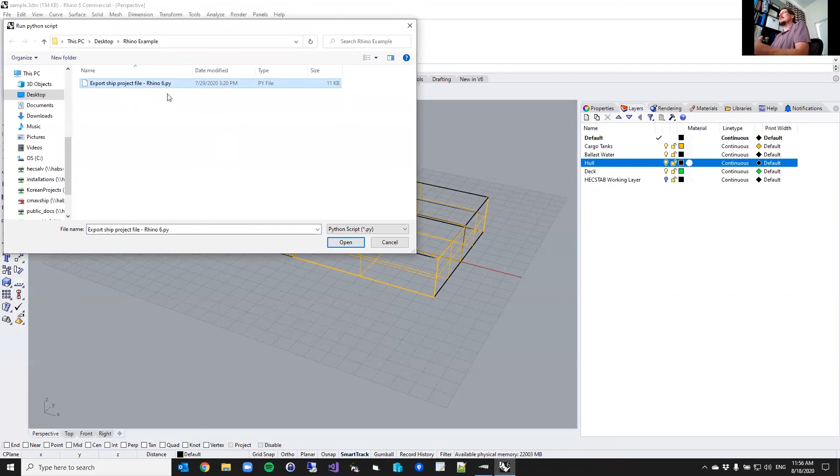So with a few simple Rhino setup steps and making sure that things are done right in Rhino, I can actually go into Rhino. They have a Python script. I can run a Python script, and we've run an export ship project file. So this is a Python file that we wrote that's leveraging the HECSTAB API, but that's being run in Rhino.

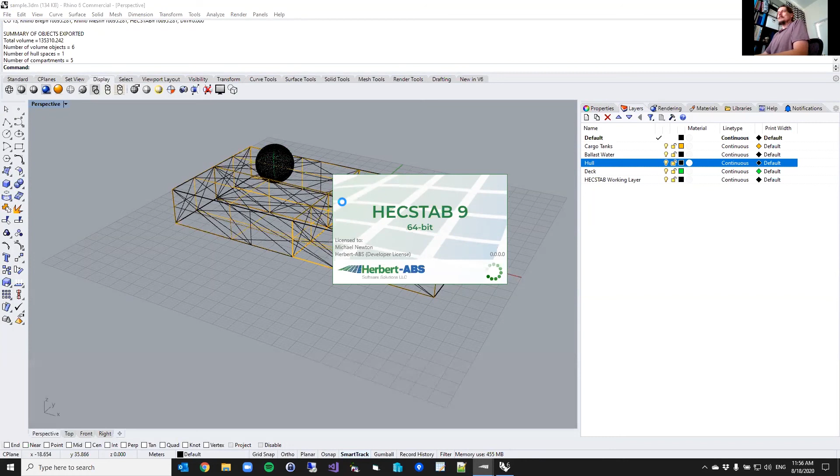And basically, it's taking the geometry, it's finding everything that meets the requirements, and it's going to export an SH2 file for me to work with. I'm going to replace this one, and then it's going to automatically start HECSTAB. And once it's finished loading, we can see that we've imported that model.

We've now got the 4 compartments defined. We've got the hull defined. We've got this deck defined. If I scroll down, because I had my layers set up in Rhino, I actually end up with my deck tank and my 4 cargo tanks together.

We expect to leverage this type of approach a lot more going forward with our modeling and improvements on our modeling side. We're working on actually getting full-on plugins within Rhino that will help set up this interface, but also allow for calculations directly within Rhino and things like that. So there's a lot of ways that we're looking at integrating and connecting with other software out there, just based on the tools and capabilities we have with the new package.

Whew. All right, I am at the end of my presentation. I've got 2 minutes to spare. I guess for the panelists that have been answering questions, Justin, Keith, Brandon, are there any that maybe you want to bring up while we have a little bit of time? The workspace question was a good one. Might be worth talking about that briefly.

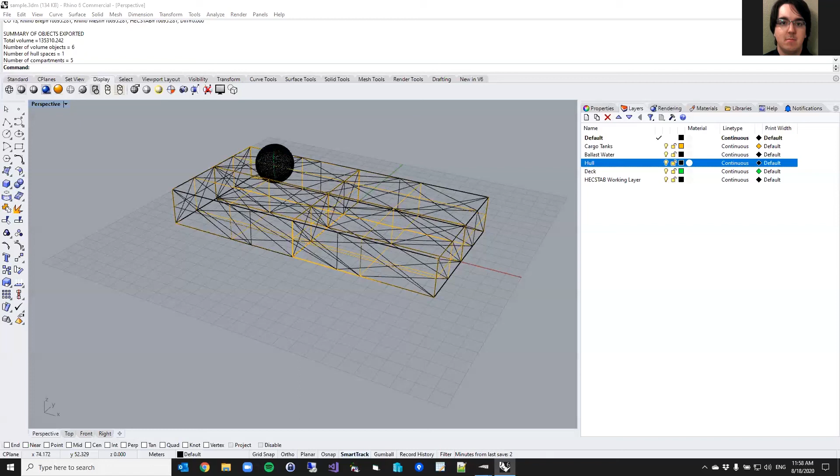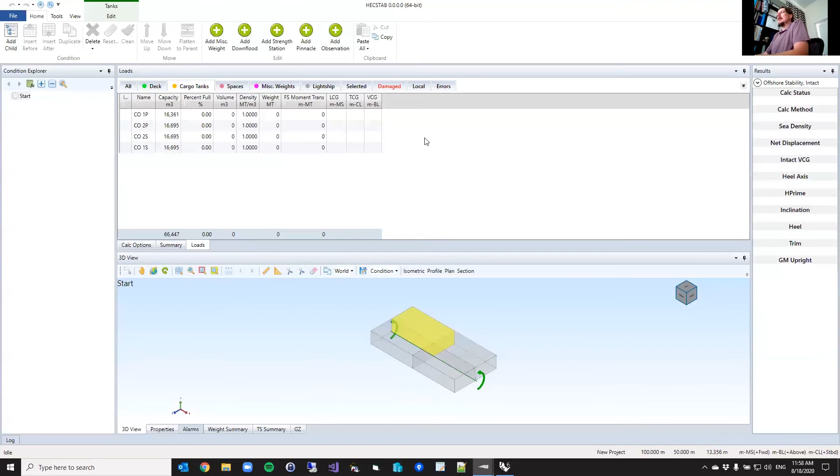Okay, so the workspace. Everything that I've been doing here, you've maybe noticed, every time that I close down, it's saving all of these things. It's saving my fields. It's saving everything that I've customized in my view, everything that I've set up in my workspace. When I close it, I've done this a couple of times, moved my 3D graphic over here. If I close down, start back up, even if I start up with a different model, if I go back to the VLCC demo, for example, it'll keep that workspace and keep that setting for you as well.

All right. There was a question about can we show how to define tanks and compartments inside the hull? That's fundamental to our software, and it's been available in our software for a long time, Gerardo. So that might be a webinar for another day, or a training for another day. But this webinar was mainly focused on what's new and improved, and what's coming on the HECSTAB side. But as you can see, it did keep my views. It did keep my layout.

Gerardo also had a question about training. How to get training. Yeah, we offer training as requested by our clients. We don't have any set schedule or anything like that. We customize training on a per client and as needed basis. So for new users, we normally recommend a day or two worth of training, especially if it's an office where you've got multiple users.

With COVID restrictions in place and everything up in the air as it is, we are offering and have done a number of online training sessions as well. So that is an option if you wanted to. It reduces expenses and exposure, but I think you can get a lot of the same benefits and a lot of the same rewards out of doing online training.